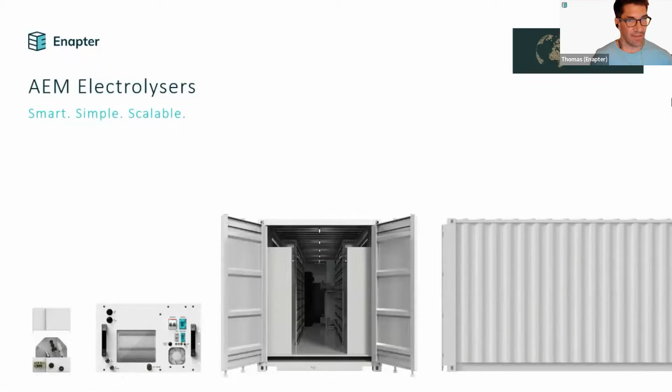So at one glance, we started Enapter in 2017. Ruben, thank you. It was started by Sebastian and Vaitea, who's on the call here today as well, and Jan Justus Schmidt, who is not here today. Meanwhile, we are not only a pioneer, but commercial leader when it comes to AEM electrolysers. We had thousands of electrolyzers ordered by partners such as yourself and customers across 44 countries, which makes us very happy and gives us a lot of confidence that our approach to the market could be working. And that is the approach to focus on a highly standardized and mass-produced product. I'm going to elaborate a little bit more on that for those of you who are not 100% aware.

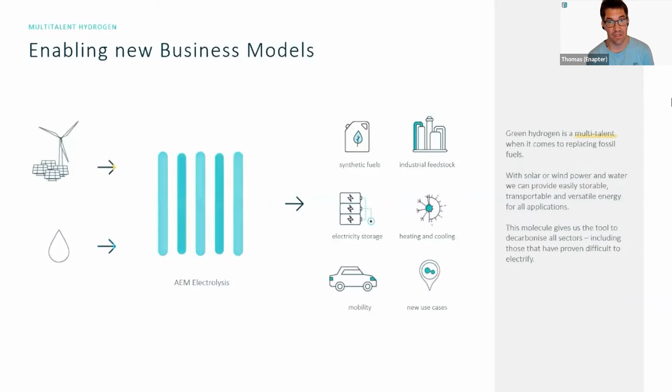We are rooted in the AEM electrolyzers. This is our secret sauce. And in fact, we think that AEM combines the best of two worlds. We have on the one side alkaline electrolyzers that have been in the market for a long time, and they provide the lowest cost hydrogen today. And then we have PEM electrolyzers with the dynamic response and intermittent operation. They really seem to be the future if they weren't pricey. And we think that's where AEM is coming in. We have the same low-cost materials that alkaline is benefiting from, but we have the same performance as a PEM electrolyzer.

Our disadvantage is that Enapter and AEM have a limited track record, but together we're actually building that track record and learning fast, improving the products. And with our scaling approach, we think we can really harness the cost reduction potentials and go to the market even faster.

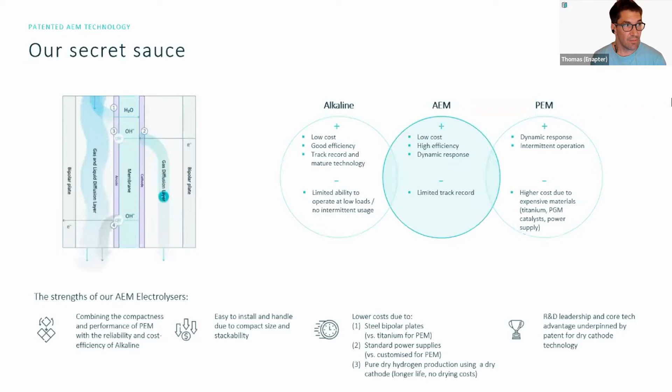So our strategy is a little bit mirroring what we have seen in the market when it comes to rapid cost reductions. In the 80s, the mainframe was considered the future of computing, and the PC at first was a little ridiculed and belittled as a small device, and who needs it and why. But in the end, it was a standardized product. And today, all of our data centers are made up essentially of PC technology, blade computers, highly standardized mass-produced devices.

And in the energy industry, we have seen a similar development with the solar panel that disrupted the energy giants and large centralized power plants. The solar module is, again, a standardized and highly scalable, mass-produced commodity. And we really think it is time for hydrogen. It's green hydrogen's turn to mirror that development.

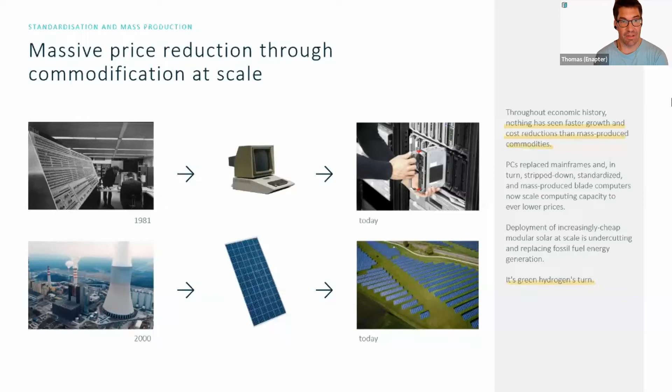So at the core of our strategy is really a platform approach. And as you all know, we focus on that 2.4 kilowatt stack of ours that produces half a cubic meter of hydrogen per hour. And we think if we produce that in masses, we can not only use it in a single core electrolyzer that most of you know and actually use, but we can also use it in a multi-core approach in the megawatt electrolyzer, the AEM multi-core and derivatives of those.

So the multi-core will not be our only, let's say, wrapping for our stacks. There will be other variants in the future that will be coming up. And I think it's a very unique approach across the industry, clearly. But we see the advantages that we have high speed of product development, reduced development cost, and a way to very quickly increase product variety. And that's why we're following that approach.

So what is an essential part of that strategy, on the next slide, is that we're really just in this business to provide building blocks, hydrogen building blocks, and integrators are creating the solutions. We try to provide something for every size. The single core electrolyzers in the single kilowatt ranges, if stacked up, to mid three-digit kilowatt ranges. And then ultimately the multi-core electrolyzers for a range from 500 kilowatts and upwards. And let's see how far we can go with that.

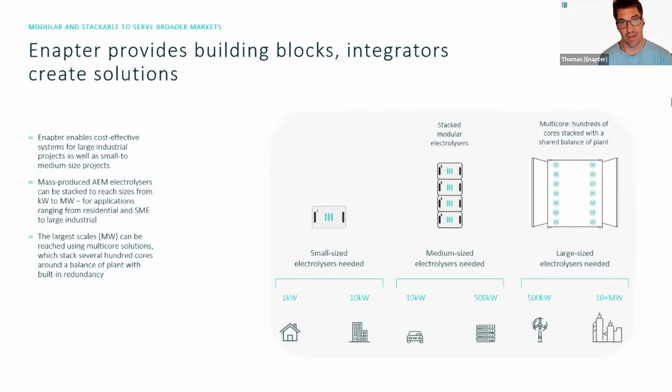The core principle, however, is on the next slide: Enapter will stick to the part where we're making products. And when the product, be it single core or multi-core, leaves our premises, this is where the partners are coming in. And this is why we're putting such a focus and emphasis on building that partner network, because ultimately you guys are stacking our electrolyzers and creating the solutions on the customer side.

And whether that's small scale refueling, electricity storage, or heating and cooling applications, or large scale industrial use, ammonia production, power to gas applications, we already see everything in the applications that our partners are building. So the bottom line, we want to commoditize our product to get us and you very fast into the market, very scalable, and contribute to flipping global warming.

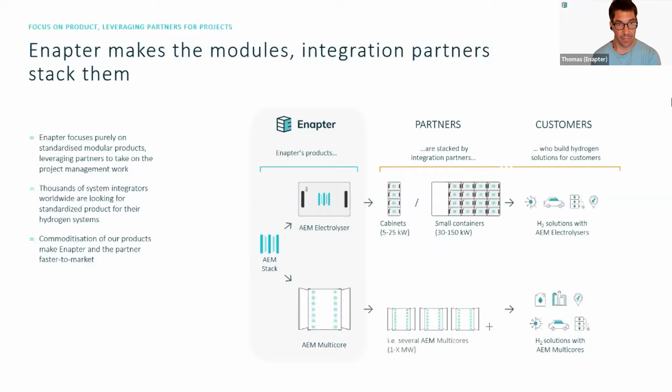So for those of you who have visited us in Pisa, you have seen how we have grown. In the bottom left, you see our expansion in Pisa. Building number one, the one which is covered in solar panels, was the first one that we used. And then we set up our serial production facility in building number two. And we've just commissioned building number four. The large picture here, it still looks like it's being set up, but actually in the past days, we started to move in.

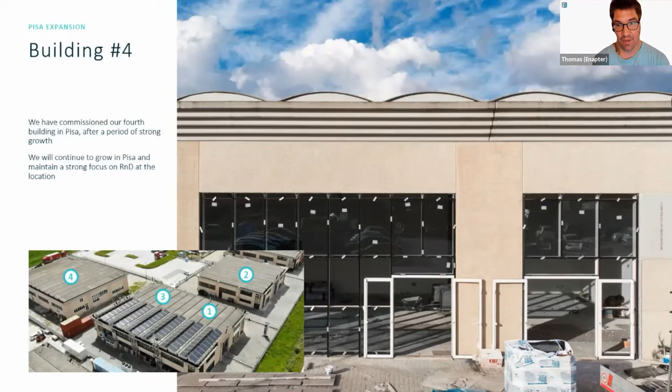So Pisa will continue to be a very crucial point for us, where we will have R&D, engineering, and also production for many of the electrolyzers. And then obviously the big step is our mass production site in Saerbeck in Germany, which I'm sure most of you have seen as well.

You can see we're running out of space, but we're becoming ever more efficient, so that even in Pisa in 22, we expect to be able to ship 500 electrolyzers per month, maybe more, to you for your projects. And on the next slide, yeah, this is the big project that we have ahead of us. The Enapter campus broke ground in September 21.

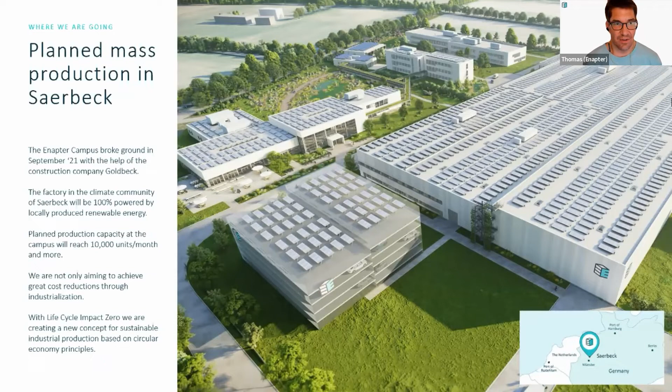And we have coined the term life cycle impact zero, which describes a new concept for a sustainable industrial production and includes much, much more than just energy. We're only starting to roll that out. You can find a blog post about that topic, and we're happy to talk more about it if you're interested. It might also be interesting for your customers who ask, how is that electrolyzer made and how will it be made in the future?

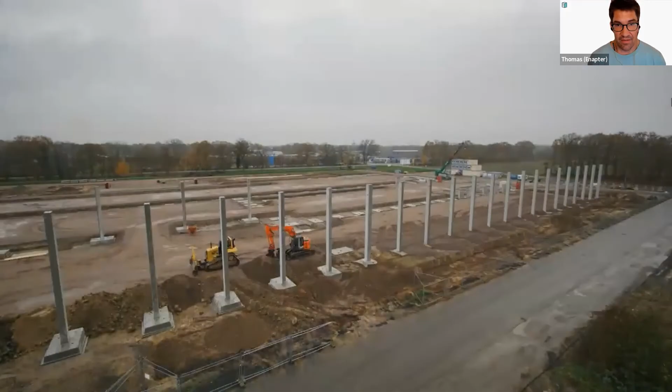Yeah, so I wanted to give you a quick insight of how the Enapter campus has been advancing. So if you want to run the video, you'll see what happened from September this year up to now. And in case that video doesn't run smoothly, I think one of my colleagues is putting a YouTube link into the chat so that you can actually look it up as well.

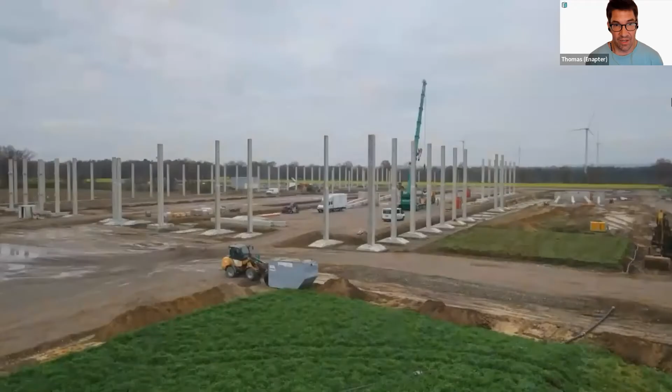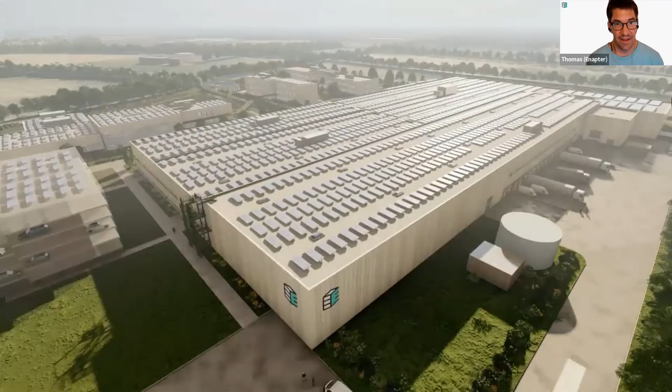You see here the production of the main factory hall. This is the R&D building, back to the factory hall. So lots of progress in a short amount of time. And hopefully towards the end of 2022, this will already near completion. So yeah, these are very exciting times for us. And I'll stop here and pass the floor to my colleague, Ruben, who will talk a little bit about our products and what is coming up next on the product side.

First of all, thank you very much, Thomas, for the great introduction and for explaining Enapter's strategy and how we plan to scale up our production in order to make a significant impact on climate change. Now let's have a quick look at how that translates to our product ranges and what we plan to do next. That was not supposed to happen. For the short amount of time that Enapter was around, we've kept our focus in R&D and product development.

Our single core electrolyzers have seen a high degree of change, but in a nutshell, they got smaller, lighter, easier to use, easier to assemble, but most importantly, cheaper. And they will continue to do so as we keep going with the industrialization process. We want to get to a point where our electrolyzers are a commodity and the hydrogen produced is cheap enough to enable business cases that were not previously possible. So the next step towards achieving this strategic goal is to make a design which is ready for industrialization.

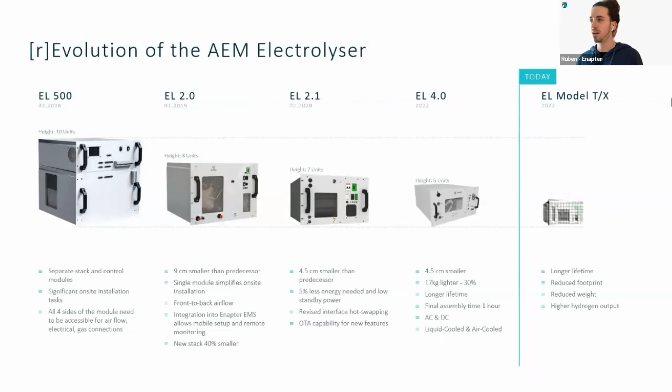And today, we're thrilled to announce the next generation single core AEM electrolyzer, the EL 4.0. This new generation offers many advantages over the previous ones, but in a nutshell, it is much lighter, it has a longer lifetime, and it is easier to assemble. It will be available in an AC and DC configuration, as well as liquid cooled and air cooled. But now let's have a deeper look at it and maybe show you some better pictures.

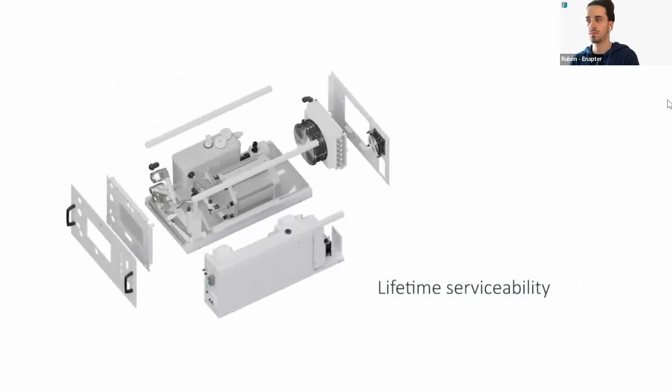Great. So the next generation AEM single core offers significant advantages, given that its new design is mass manufacturable and, as I said, ready for industrialization, which is core to our strategy. Its smaller size and lighter weight will allow for much cheaper shipment, and its new O2 recombiner and H2 sensor will enable much easier compliance with various industrial standards, as well as the ISO readiness will do so for complying your hydrogen system to such ISO standards.

The first deliveries of the AEM EL 4.0 will be available from summer 2022, and we will have a deeper session on it tomorrow, so make sure you don't miss that.

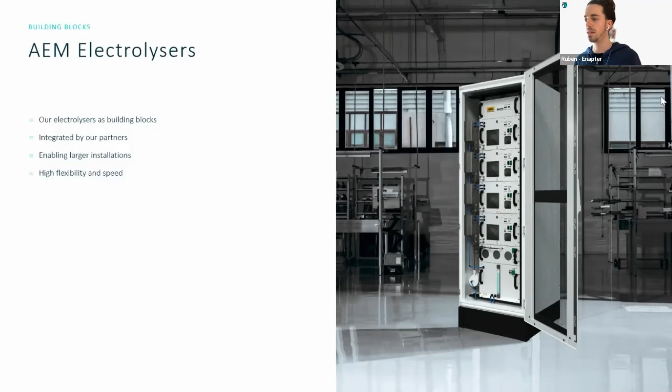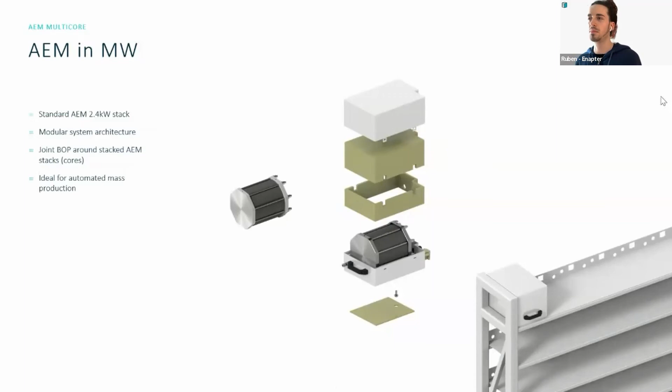And so building on the fact that our electrolyzers are meant to be the building block so that you, our partners, can integrate them into systems of all sizes with a high degree of flexibility and speed. Based on this approach, we plan to move to the next level of electrolysis, moving to the megawatt size, as Thomas already mentioned, using a similar modular architecture. So we plan to use the same proven 2.4 kilowatt stack and build a balance of plant around several hundreds of the stacks that can be easily automated for production.

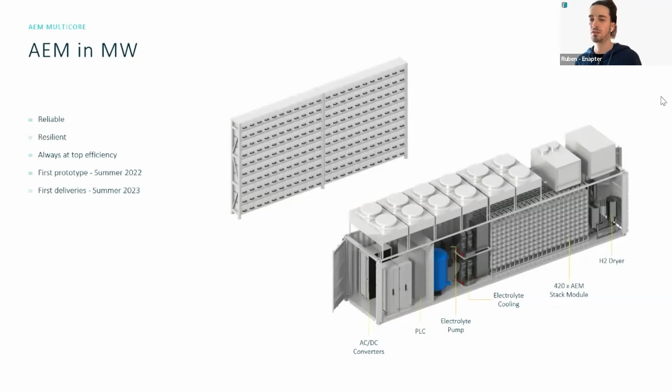This way, we can achieve a reliable, resilient megawatt size electrolysis while staying at top efficiency and ensuring a high degree of flexibility. The first prototype is being built at the moment, and it will be ready around summer 2022. And the first deliveries are scheduled for summer 2023. We're already taking some pre-orders. Please feel free to get in touch with us if you want more info.

And in a nutshell, we plan to have it as a 1 megawatt standardized solution that could fit into a standardized 40-foot container. And the main advantage of this is that due to its modularity, it can run with a high degree of flexibility between 3 and 105%. Also, the hot startup time between 0 and 100 within seconds makes it ideal to be coupled with renewable energy sources. And we will also have a deep dive on this on Friday. So if you're interested in megawatt size AEM electrolyzers, make sure you don't miss that as well.

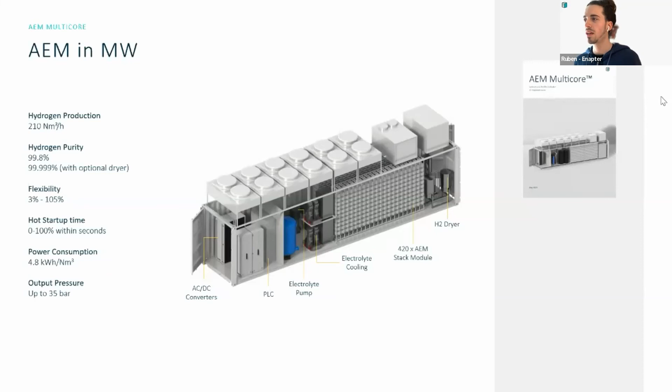But Enapter is much more than just a hardware electrolyzer manufacturer. As Thomas already mentioned, for us, it's extremely important to couple together software and hardware. And we offer an integrated management system, which not only allows you to monitor and remotely control our technology, but also to integrate third-party components such as power meters, fuel cells, sensors, and inverters. This way, we want to enable you to make the most out of our technology and integrate it for your project in the best way possible.

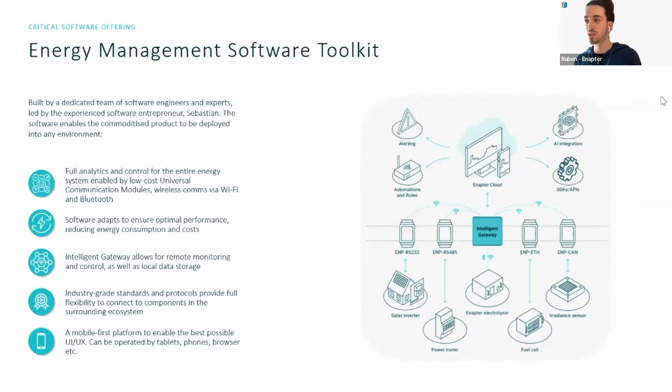So this was a brief introduction about Enapter, our vision, how we plan to go forward, and our strategy. I hope you enjoyed the rest of the training, and now I would like to pass the word to Max for the next session. Okay, I see there is a question.

What is the temperature and IP grade for a cabinet outdoor installation possible because of local building and firefighting rules? Yeah, that's a great question. So to be honest, I can't give you the answer, or the answer is that you won't get the cabinet from Enapter. We used to do that 2 years ago, but if you recall our slides, we said we will focus purely on shipping electrolyzers, and we leave it to the partners. So you might actually see a few partners with background images of cabinets. So maybe screenshot those and get in touch with them, because they're building great cabinets, both for indoor and outdoor use. Yeah, if you need any concrete names, feel free to reach out to us. We'll be happy to connect you.

And maybe I'll just quickly take the water question before we pass the floor to Max. So I think our water requirements are not as demanding as for a PEM electrolyzer, and we hope that that will remain that way. So with a simple water purification system, you can achieve the water quality needed. Actually, seawater cannot be used, so the water needs to be desalinated before use. And yeah, sorry, now I can't see the questions anymore. I hope that answered the question.